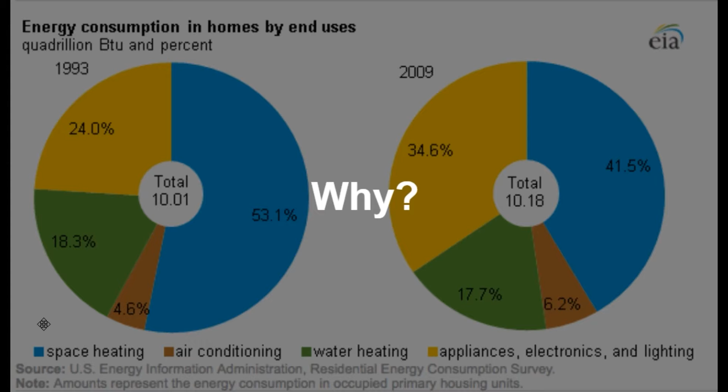We wasted our energy by heating our space and leaving the lights on. In our community, energy is wasted by leaving lights on in buildings and using excessive air conditioning. So we need more effective and environmentally friendly resources like solar systems to change this situation.

In the United States, utility-scale solar power plants are located primarily in the Southwest. There are two ways for us to harness solar energy.

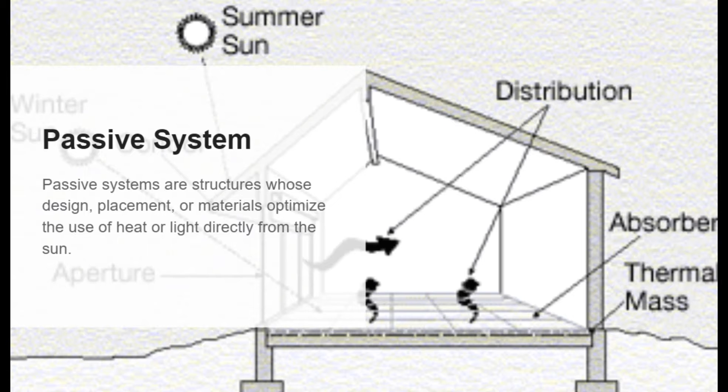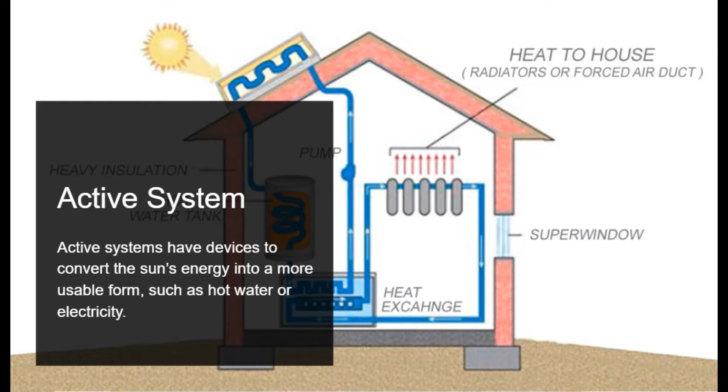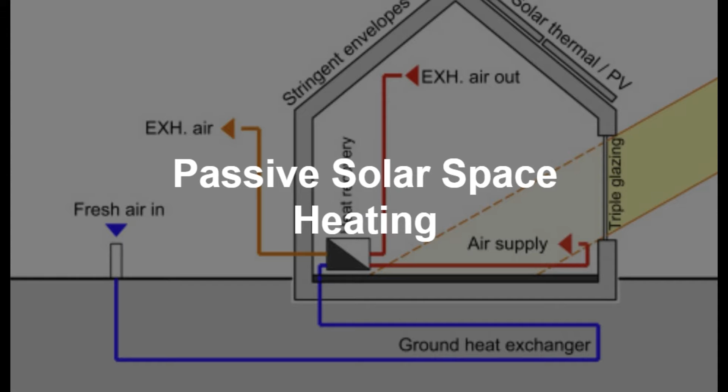First is the passive system. Passive systems are structures whose design, placement, or materials optimize the use of heat or light directly from the sun. Active systems have devices to convert the sun's energy into a more usable form, such as hot water or electricity. Passive solar heating systems are a simple and cost-effective way to take advantage of the sun's free renewable energy and displace the need for electricity, natural gas, or other active energy systems.

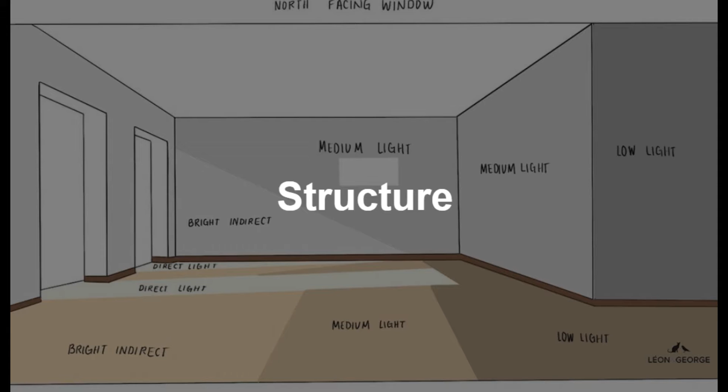Strategic planning of building location, orientation, and materials provides good control over the inside temperature. Installing large south-facing windows, planting shade trees, and using trombe walls, which are made of absorptive materials that store heat during the day and slowly release it at night, are measures that can be adopted for new and old buildings alike. Sun spaces or glass rooms built on the south side of a building can provide up to 60% of a home's winter heating. Wow!

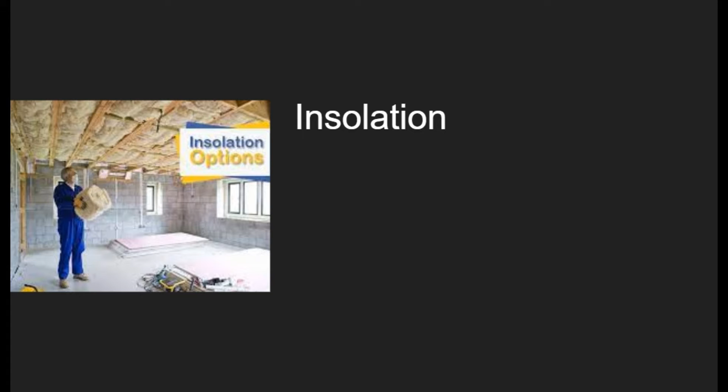Regardless of climate, solar energy can be harnessed as long as the building has adequate insulation and ventilation.

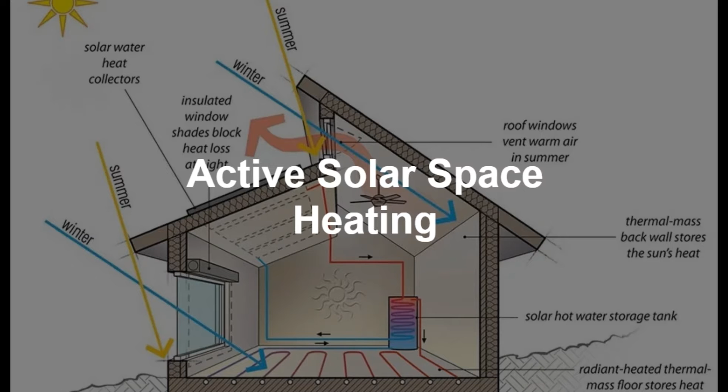Active systems: in an active solar space heating system, a collector holding a heat transfer medium, such as air or liquid, captures the sun's thermal energy, which is then distributed through the building via electric fans or pumps.

Currently, there are no prefabricated residential solar heating systems, so interested customers must hire a specialized engineering firm to design an adequate system. The costs for such systems range from $3,000 to $10,000, depending on the size of the space.

With savings in electricity or natural gas, active solar heating systems can pay for themselves in 7 to 10 years. These heaters are one of the most commonly implemented renewable energy technologies because of their cost effectiveness and relatively simple installation. Yes, with the proper model installed, they heat efficiently regardless of outside temperature.

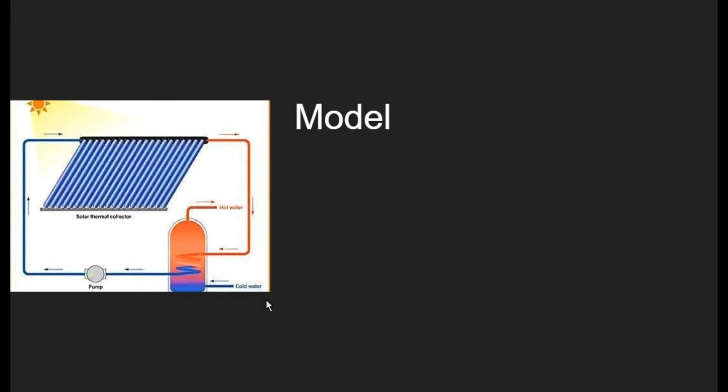Solar water heaters typically need a backup conventional gas or electric water heater to account for cloudy days or unusually high water demand. Solar water heaters consist of two parts: a solar collector and a storage tank.

In warm climates, collectors heat water directly, but in cold climates, a denser fluid is heated and then transported to a water tank where it heats the water indirectly. The heater can be built to use an active or a passive system for circulating warm fluid, depending on the climate and the time of day when water demand is highest.

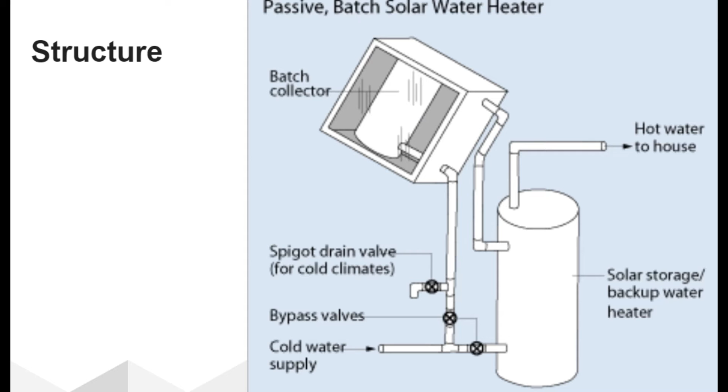So what makes our energy better? First, solar radiation is a free, clean, and renewable source of energy. Converting solar radiation to solar energy is pollution-free.

And it reduces your electricity bill. Traditional electricity generation, transmission, and distribution is getting more expensive day by day. To reduce the bill, more and more people around the world are installing home solar panel systems.

There is very little to no maintenance cost involved. Most solar companies in the world offer a warranty of 25 to 30 years on their solar system. Most estimates for concentrating solar power range from 0.08 to 0.2 pounds of CO2 per kWh.

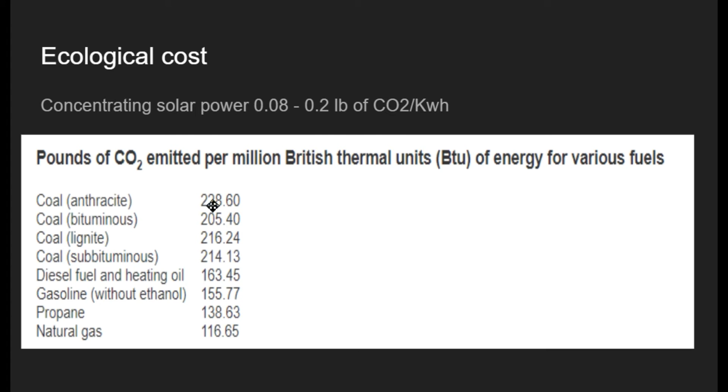But if you look at other energy sources, their CO2 emissions are different. They have 3 digits of numbers, and we have 0 digits, right? Yeah.

And for economic cost, a passive home can cost $150 per square foot, or more than $500 per square foot, depending on the level of finishing.

Currently, a passive house only costs 5 to 10% more than a conventional house. Larger projects benefit from the economy of scale, so if you're building a commercial structure or a big house, you can use this system to benefit from that.

Community solar allows people to take advantage of reduced electricity rates and clean energy without having to install or own a solar array on their property. It doesn't hurt the community at all.

And the future is bright. As long as the sun still exists, our resource will not be exhausted. That's why it's called renewable energy. We still have 5 billion years to use it.

The latest development of passive and active solar power includes better house design and better thermal insulation. The system will become cheaper and cheaper, and it will become a necessity of every house in the future.

Let's talk about laws. The ITC law provides a tax benefit for installing residential, commercial, and utility scale solar, and this law encourages solar project owners to sell more projects, which decreases tax income. And PURPA can mandate that utilities purchase energy from solar and other qualifying facilities.

And there are more laws like FERC, DOE, and the U.S. Energy Information Administration, which provides comprehensive data on U.S. energy markets. Wow. Oh, okay.

So coal is our opponent. First, it's very dangerous. In 1910, about 100 years ago, 2,000 people died mining coal, as reported in the U.S. that year. But for solar power, you just need to install it and wait.

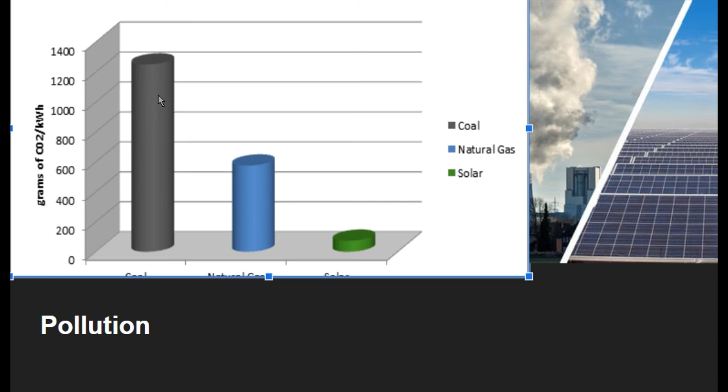Pollution: solar power systems basically have zero pollution. You can see coal, the black one, the big black bar, is much taller than the green one, which is solar.

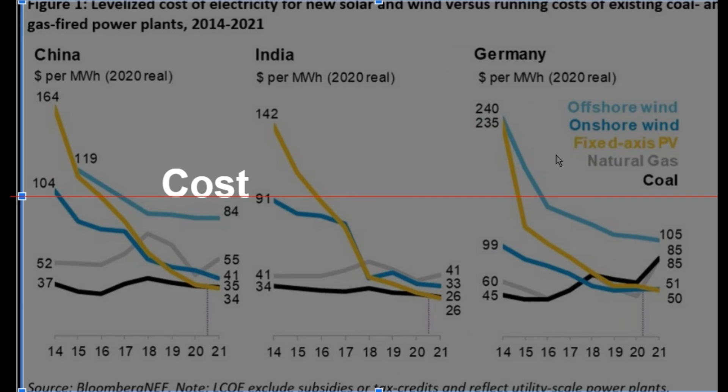Cost: the yellow line is the cost of solar power over time, and you can see it's getting lower and lower. But the black one, coal, is increasing in cost, and it's much less efficient than solar power now. So you can see solar power will in the end become the cheapest energy source in the future.

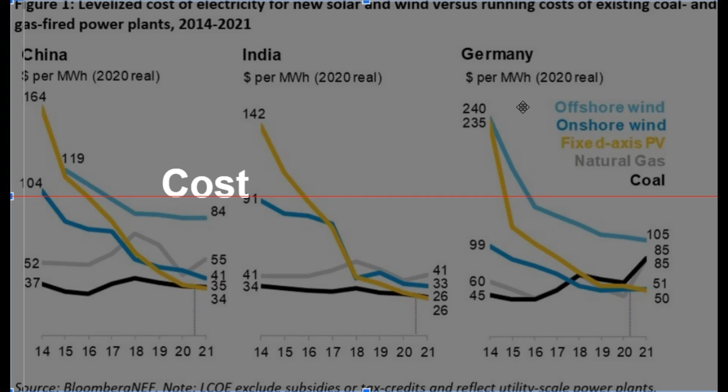And we also have a sustainable future. Generally, solar is increasingly more competitive or cheaper than other forms of energy. That means switching to renewables can help municipal governments save taxpayers' money. It will also stimulate the local economy and create well-paying green jobs.

Solar cogeneration, also known as solar cogen or hybrid solar, combines proven photovoltaic (PV) and solar thermal technologies in a single system to deliver both electricity and hot water.

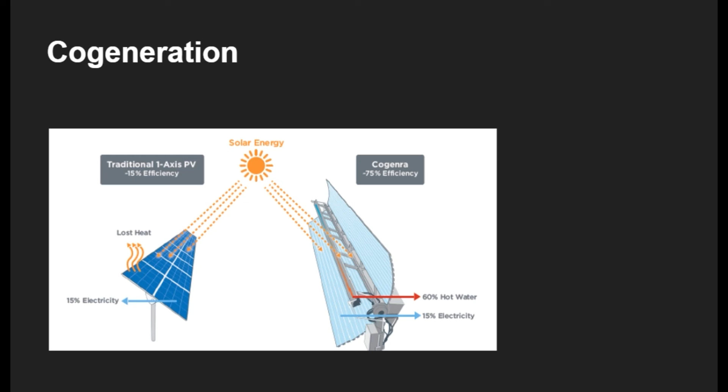Okay, so many people say that we have some skeletons in our closet, but I strongly disagree. One critic said that we may be affected by the climate, so when it's raining, the thing may not work.

I mean, it's raining and it's working, so joke on you. And somebody said it's expensive to build and needs space. Somebody said it has limited power. Wow, okay, and you guys are ridiculous.